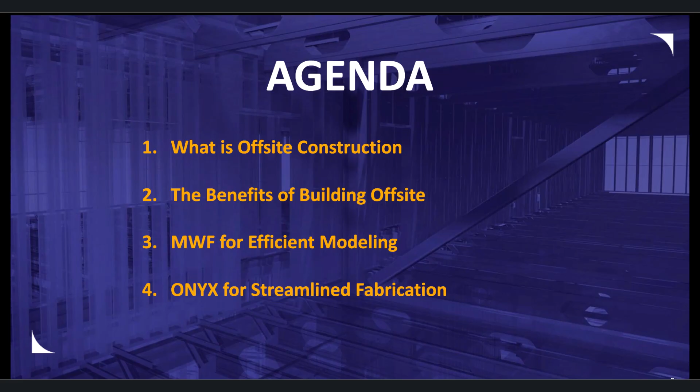In today's presentation, I'm excited to talk about what is offsite construction and the benefits of offsite, modular and prefab. I'm also going to go into MWF where I'll do a live demonstration showing some of the benefits of our tool. And following that, I'll jump into ONYX, where again we'll look at some of the features and some of the benefits of the tool as well.

So, what is offsite construction? You may have also heard the terms modular construction or prefabrication, which all fall under the same umbrella of offsite construction. And while these terms differ slightly, they all point to the same idea. As the name suggests, offsite construction is a fabrication or manufacturing and assembly of building elements at a location away from the final construction site.

Typically, this means a factory equipped with manufacturing equipment where components are produced and assembled rapidly and then transported to the job site. The idea behind offsite construction isn't new, but by taking advantage of technological advancements such as software solutions, CNC machinery, and robotics, the innovative method of construction has transformed itself into a valid substitute for traditional site-built construction methods.

The great thing about offsite construction is that it's used for all kinds of projects, including residential, commercial, and mixed use. Its applications are virtually endless. In certain cases, you'll see a mixture of traditional site-built construction and offsite construction, where only certain components, such as the wall panel, are manufactured in a factory, while the majority of the structure is built on site.

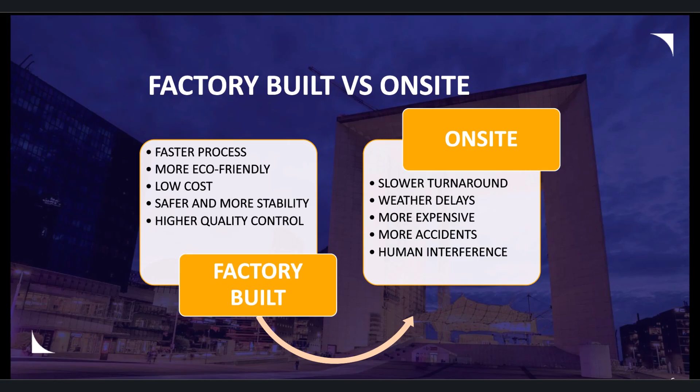One of the benefits is 20% faster design to production. This time is greatly reduced by keeping the framing data in Revit versus solutions that require a third-party platform for fabrication drawings. There's also a 42% faster fabrication drawing production, as 3D model parameters and drafting automation reduce the completion time of 2D fabrication drawings by reducing errors and change orders.

We have 90% waste reduction. This can be realized through accurate CNC output control and editing in a 3D environment, versus the manual check and edit process in older systems.

We'll also see a 20 to 50% increase in faster build rate. A project can be completed 20 to 50% faster using modular offsite methods compared to traditional construction. This is due to the elements being constructed in a factory environment, where processes can be automated and carried out a lot faster.

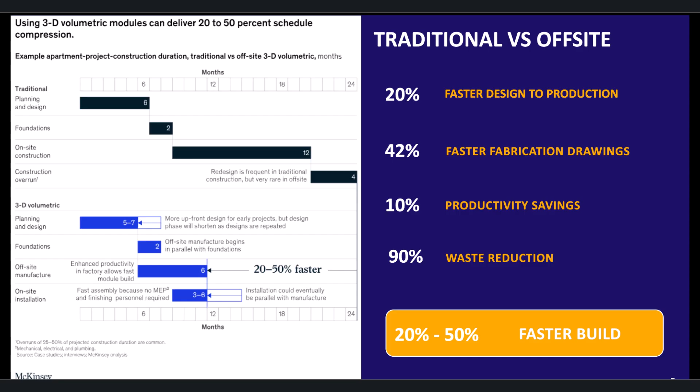So when we think about offsite construction and what it represents, we think of all the benefits of how it can boost productivity, save time, and streamline repetitive tasks. I'm going to show you a range of tools that exhibit those same qualities through the use of MWF.

I'm going to start by using the Quick Create tool, which will aid us in the creation of panels and reduce the amount of time it takes to produce our panels across a whole project. With the use of some templates and predefined settings, we can automate the placement of the panels by mapping our wall types to our templates.

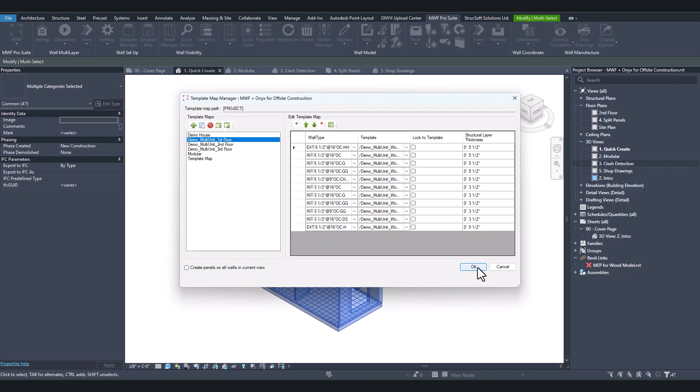So if I go into MWF, into template map, I can simply select a template which has been predefined, and from there we have a range of wall types which we can map to our MWF templates. From there we simply select our walls and hit Quick Create.

So this tool automates the framing process to ultimately reduce modeling time. And once complete, you can see that it's framed all of these different types of walls at the click of a button.

If I were to relate this to offsite construction, I'd say that we're implementing time savings through modeling and automation, and this is something we can also do when we compare offsite construction to traditional construction methods.

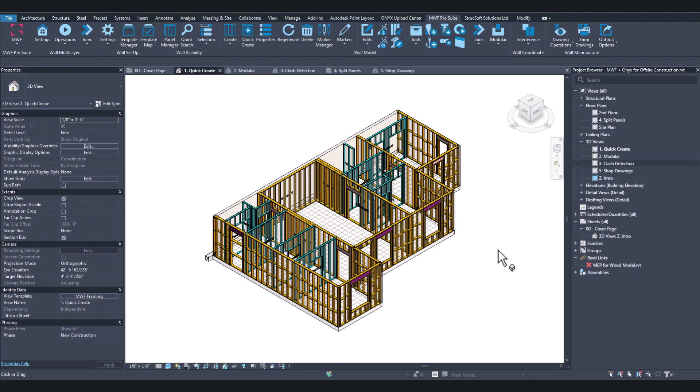So now we'll take a look at the modular tool, where we can see how this can also be used to boost efficiency in our workflows.

When using the modular tools, we can frame multiple units or panels that share common features and characteristics. This can be done quickly and effortlessly with a selection of modular commands. Again, in offsite construction, generating multiple elements in a short space of time is one of the key benefits of implementing these offsite construction techniques.

So what I'm going to start by doing is selecting one of these modules. These units all share common features, utilizing the same panels over and over again. Again, we can use the Quick Create tools: first point towards our template map, select the appropriate template map, and go ahead and hit Quick Create.

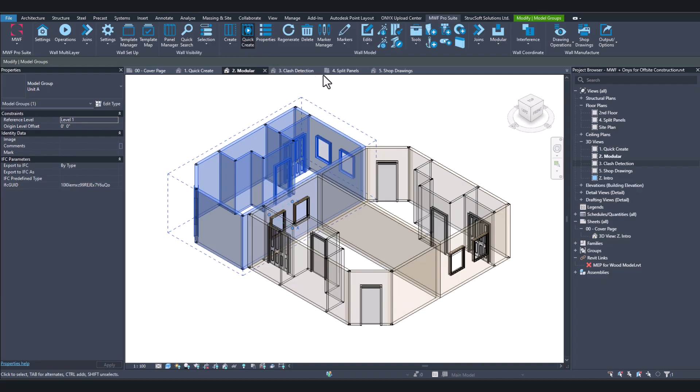So we can utilize this tool in a way that will supercharge our Quick Create feature by applying our settings to multiple modules at once across a project. This can be used on individual panels or on whole units. The tool has a few different features that we can use to match properties, copy elements, and ultimately delete elements when we no longer need them.

And as mentioned before, one of the key benefits of offsite construction is the ability to generate multiple elements in a short space of time. Once complete, we can see that multiple walls have been panelized within this unit.

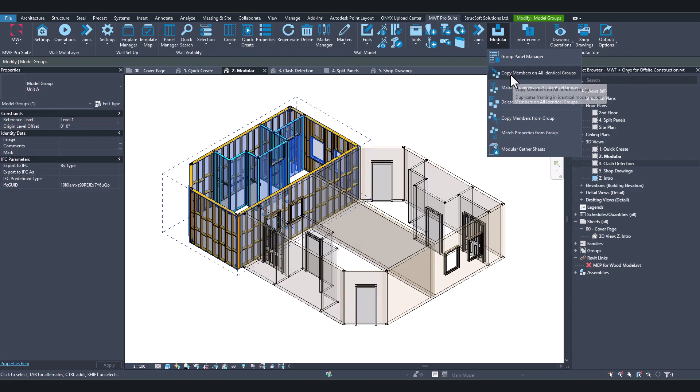So now these panels have successfully framed using the modular tools. You'll see that the original unit that we selected is now framed. So what I'm going to do is copy the members from this original group and have them applied to the remaining groups. So I'm going to go into modular and use copy members on all identical groups.

We can choose our naming convention, so we can keep it consistent with the panels that they were the original panels that these new panels will be generated from, and we can share the same name by using same as original. Otherwise, we can continue the numbering and have each panel have its own independent identification number.

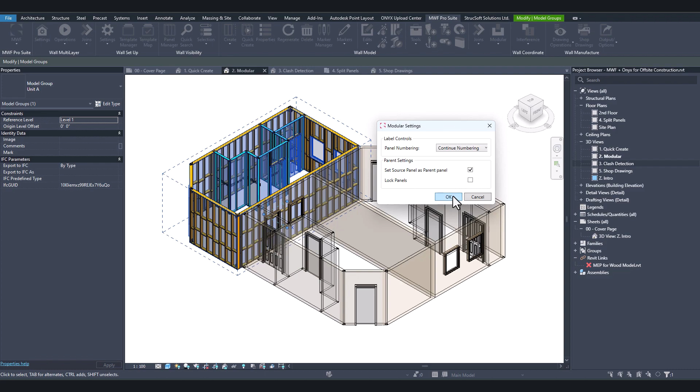We can choose to set the original panels as the parent panels, and if we were to lock our panels to a template, we could use the parent panels to regenerate the new settings or generate the new settings. So now these additional units have been completed, you can see that they are consistent with the original panels that they were generated from in this modular unit.

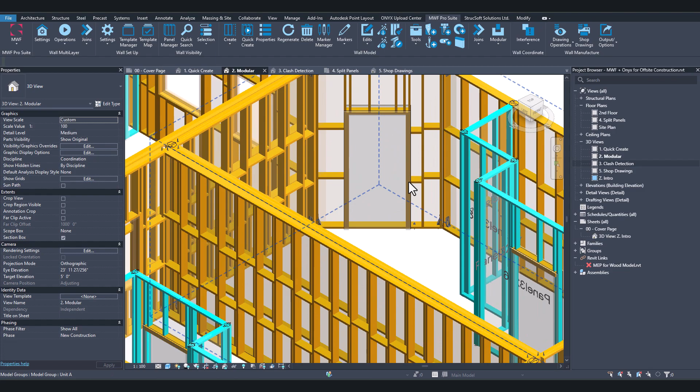This also ties into offsite construction in the way that we can generate these 3D volumetric and panels and elements and mass produce them in a short amount of time. What I'm going to do now is show you how we can make a modification to one of these elements within one of the units and apply the changes consistently to the other units.

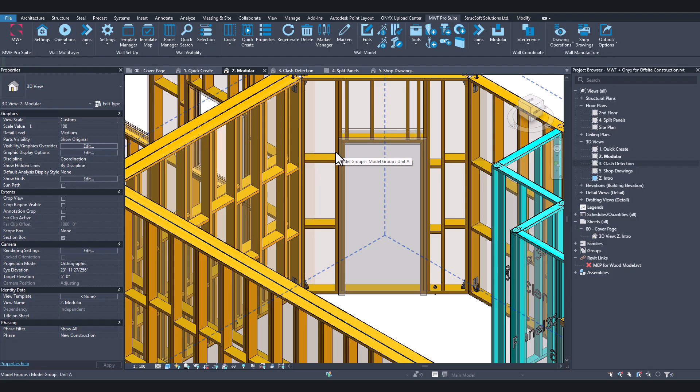So I can go into the panel properties, miscellaneous, and make a quick change. So we're looking at a door, and we want to add an additional king member on the door. Now you can see the additional member that's been added either side of the door opening. We can now apply these changes to the other units.

So if I refer to this unit here, you can see that we don't have the additional members around the opening. So what I can do is I can select this unit and still apply the changes made in my other modular unit and have them applied to this panel in the same way. So in modular, we have a tool called match properties, and we can do this for all panels which share the same group, or we can select individual elements and apply the settings.

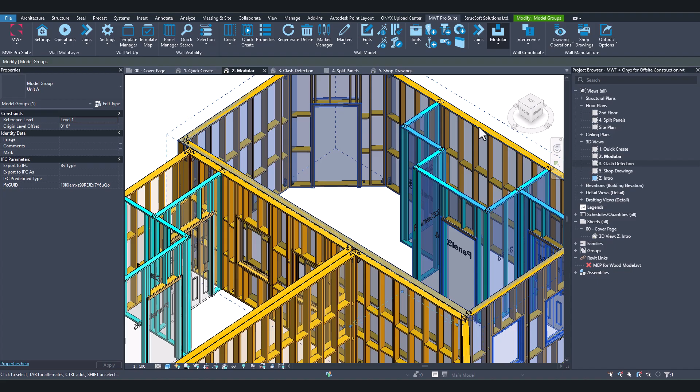Okay, so I want to select this unit first, and then from there I want to say match properties from group, and I want to take the properties from this group. Again, I've got the option to change the numbering convention. For now, I'm going to click OK.

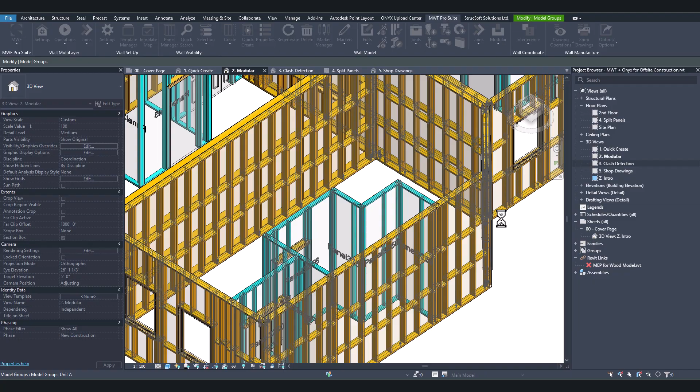So now those changes have been applied, we can check that the new unit now shares the same properties. So you can see here that the panel properties have been moved across to this panel, and we can match the properties across different modular units.

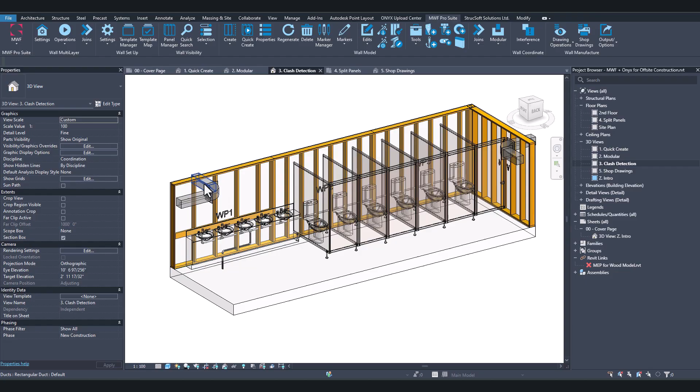Next, we'll take a look at another tool which I believe is great for boosting productivity and reducing tedious and repetitive tasks. So this tool is called clash detection, and here we have a model where some pipes are passing through our panel members, and there are some ducts passing through the face of the wall as well. So what I'm going to do is run the clash tool to prevent the clashes between these elements.

To do this manually, this would be a very time-consuming task, as we'd have to make sure there are holes punched in every single member. We'd have to check the hole type, and if there were any changes, so for example, if we had to move one of the elements or any of the elements in the model, we'd have to make sure we coordinate the holes with the new location of those elements.

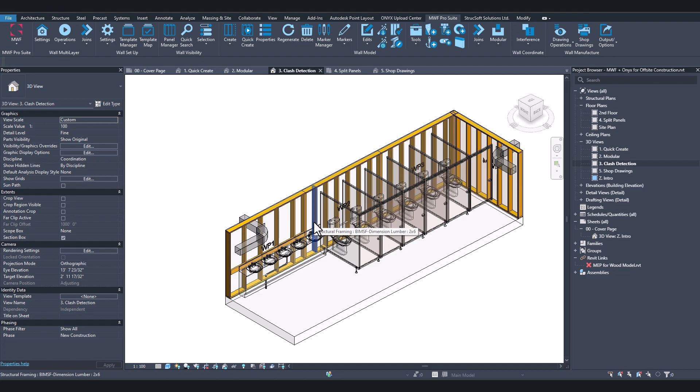What we can do is we can select, first of all, the ducts and the walls where the ducts are passing through. From there, we have a dedicated interference menu where we can run the interference check. It's going to run clash detection, and this will allow me to clash my wall against any of these selected categories.

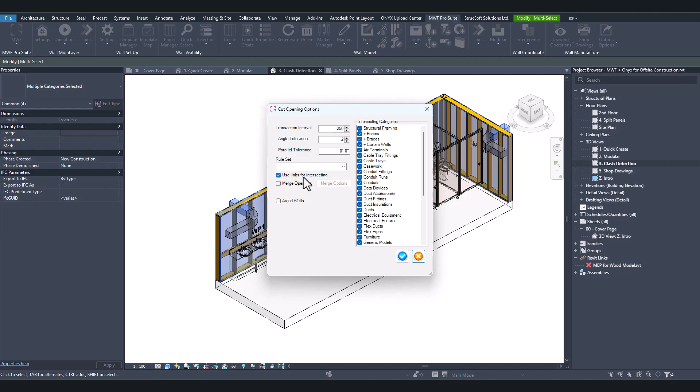We can also clash linked models as well, so if you're working with an MEP model provided by a third party, we can clash that third party model against our walls in our current model. All I'm going to do now is hit the blue tick. It's going to ask me to define a tolerance around the clashing element. In this case, we have these two ducts which are passing through the wall.

MWF is intelligent enough to detect the size of the duct, where the penetration is, and add a tolerance around the element. So I'm going to add a tolerance on the left, around the right hand side, top and bottom. As we've got multiple openings which we're generating, so we're generating an opening here and another opening on the opposite side, I want to use the same settings on the other side as well.

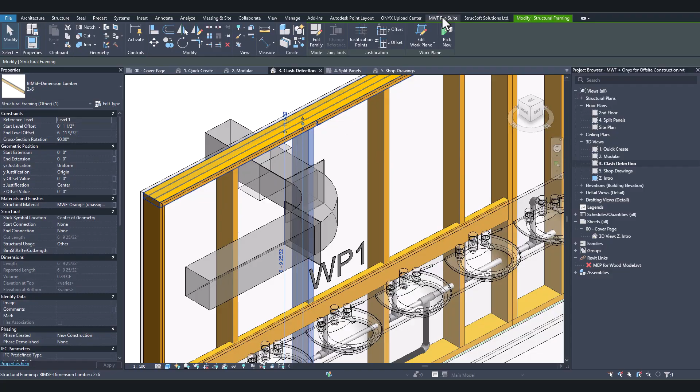So as we zoom in, you'll see an opening has been placed where the duct is passing through the wall. All we have to do then is regenerate the panel in order to show the new members or frame around the opening. This can also be done on the opposite side.

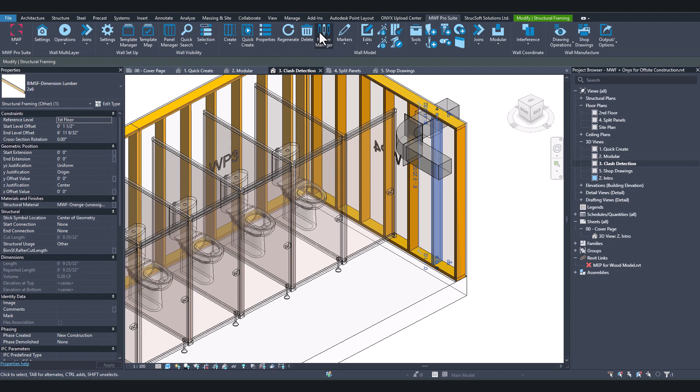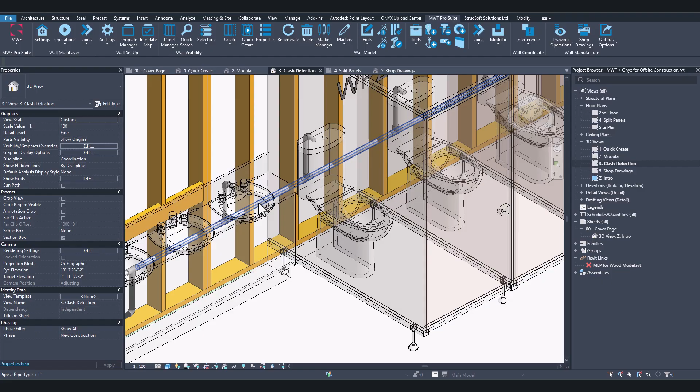So now we have another scenario where we have our pipes which are passing through the wall and passing through our stud work. We want to prevent this kind of clash, and to do so manually would take a lot of time. What we can do is we can really streamline this task by utilizing our interference MEP clash tool.

So what I'm going to do is select all the panels where the pipework is passing through. And we can go to MWF and simply click on the interference tool and run the MEP clash test. Here's my definition. I'm just going to use this to run the test. And based on our settings, 33 holes have been generated or punched through the stud work.

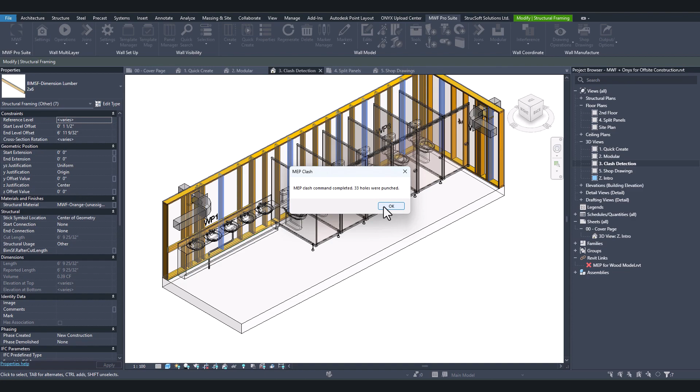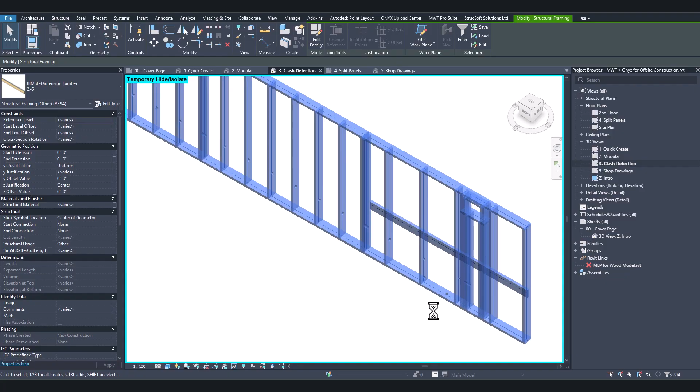So what I'm going to do is isolate my stud work, where we can take a closer look at where those holes have been punched. So you can see there are holes generated in these locations. And they've been punched automatically.

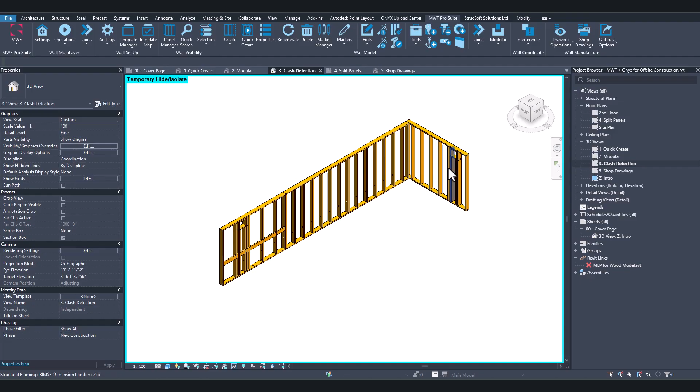Another tool that's great for productivity and saving a lot of time on a project is the ability to split walls or split panels within a wall. In some cases, you may receive a model from a third party, and the wall lengths may be too long for you to work with when it comes to transport and delivery of panels to site. In that case, we can set a maximum panel size, and we can split our panels down into smaller lengths so we can then transport them successfully to site.

Here in this example, we have an extremely long wall here, and we have another long wall just to the bottom of this model. We can split in two different ways, and first I'm going to show you a method that we can use to split this wall. So first I'm going to select the wall, go to MWF, and in the markers menu, we have a range of options allowing us to split the panel into smaller portions.

I'm going to use this vertical split by rule, which will give me the flexibility to set the maximum and minimum panel sizes. I'm going to leave the sizes set to 10 feet and the minimum panel size set to 2 feet. If there are any openings, I can ensure that there are no split markers placed within the openings, so no panels are generated in between an opening. I hit confirm,

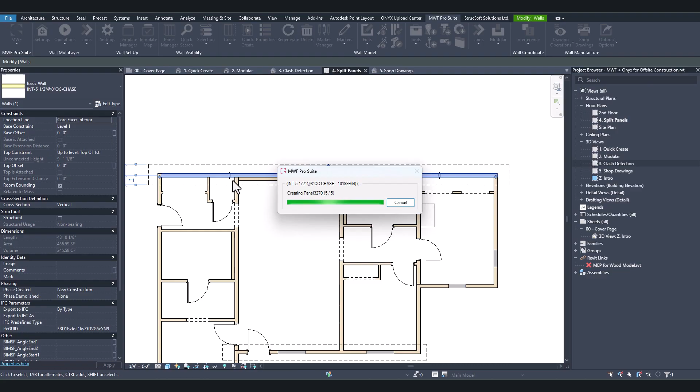and you can see in the view we have these markers that are placed consistently throughout the wall. These markers don't physically split the wall, but they will define the split points for the panels. What I can do now is select the wall, go to MWF, and simply create a panel. To split the panel into smaller portions, I can use the markers. I can choose a template, and I can simply create my panels, which will be split at the marker locations. And as you can see, we have our multiple panels generated at those split marker locations.

Another method that we can use to split our panels is simply by placing a marker directly in the view and then using that marker position to split the panels. So I'm simply going to go to my components menu and place a component. In the type selector, I can find my split wall horizontal component, and I can simply place this in the view. So I need to make sure I'm selecting a wall, and I can split my panel into smaller portions.

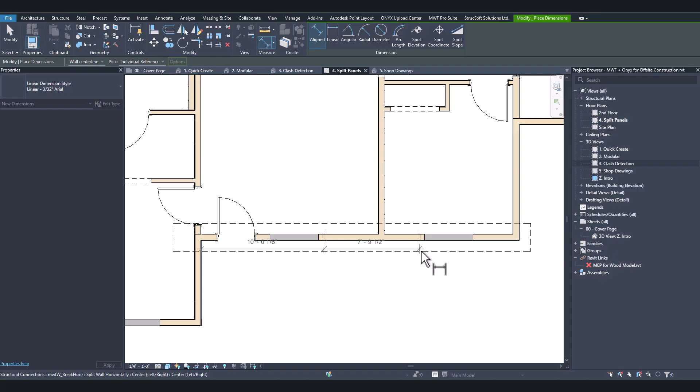If I want to be precise, I can place dimensions to control where I'm splitting to and where I'm splitting from, whilst avoiding any openings in the process. From there, again, I can go back to MWF and simply create my panel.

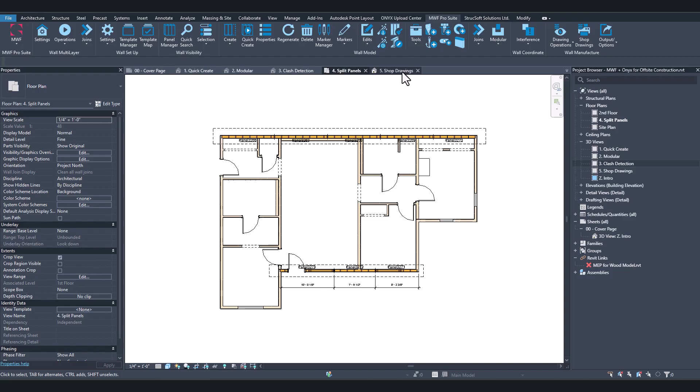So another really important aspect of manufacturing our panels and communicating our design is shop drawings. So within MWF, we have the tools to allow us to generate multiple shop drawings at the click of a button. We can select multiple at once, or we can select drawings on a panel by panel basis, but we can generate multiple drawings efficiently and quickly.

Each drawing can be consistent, and the layout and other things can be manipulated and saved as a template, which you can use to produce multiple elements at once, multiple sheets at once. In this example, we have our panel, and I'm simply going to select one of the panel members and show you how quickly we can generate a shop drawing.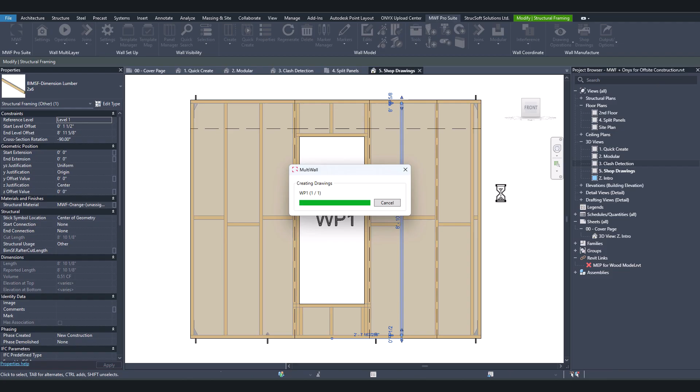So now that's complete, we can take a look at the drawings that have been generated. For each element that we need to place on our sheet, the views, associated schedules, and other elements are automatically created, and we're able to see those within our sheets.

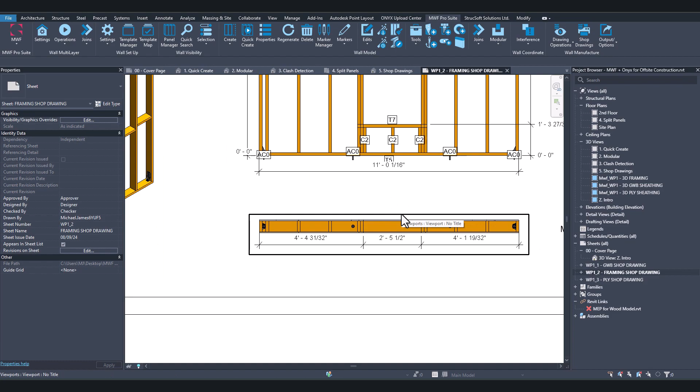Here you can see that we've got our elevation view, all dimensioned, and all members are labeled in the panel. You can also see that we have a plan view, showing a dimension based on the opening location and any hold downs and bolts placed within the panel. We have our 3D representation, and we have our framing schedule, which gives us information based on the types of members, any members sharing the same characteristics, length, and quantification.

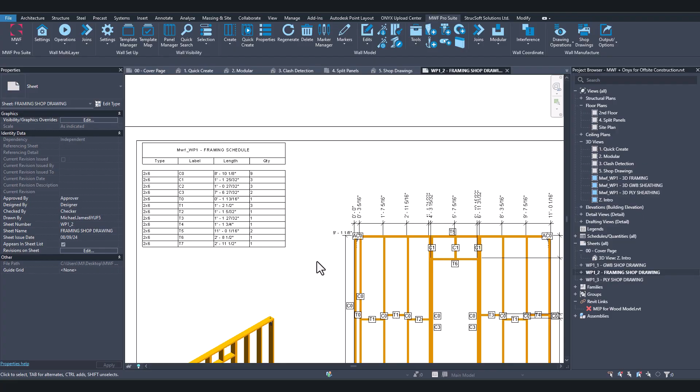These are only a few of the settings that are available, but there's a wide array of settings that you can use and can choose from.

We also have sheathing related drawings as well, and multiple settings that we can manipulate to generate all the drawings we need to extract the data that we need.

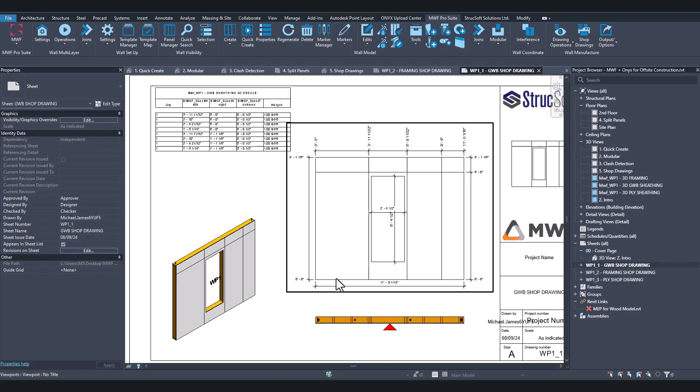So again, we have our elevation view, we have a plan view showing the interior orientation, and then we have our gypsum wallboard sheathing schedule.

On our exterior side, we have exterior sheathing, and again we have the same information that we can extract from these sheets. So we have our schedule related to these sheathing elements, where we can quantify those elements. We can see the sheet width, height, and also the sheet thickness.

All this can be modified using the settings within MWF, and there are multiple settings that we can change to generate different views and extract bits of information that we need.

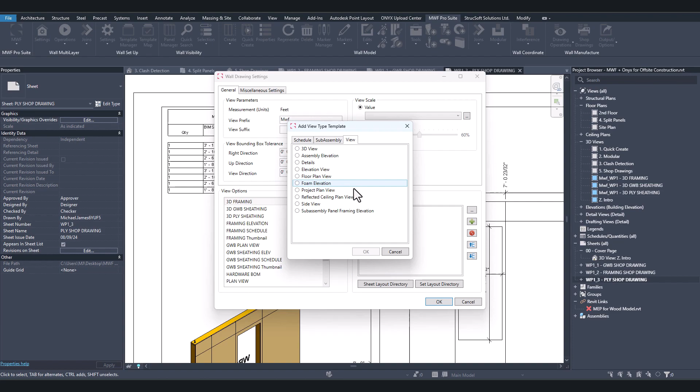One of the major key benefits of using MWF is that it sits inside of Revit. As it's a plugin inside of Revit, you can still stay within that Revit environment and still utilize all those Revit features alongside MWF. There's no loss of data, and there's no need to jump into a third-party application in order to get additional information. A lot of the information is still held within the Revit model and still accessible within the MWF plugin as well.

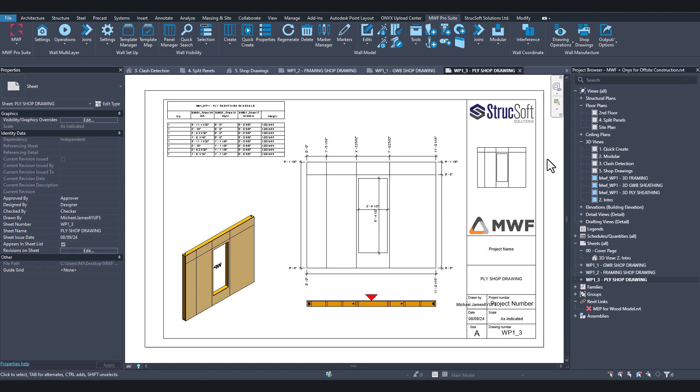I've shown only a selection of tools available to use in MWF, and hopefully these demonstrate some of the capabilities that we have to boost efficiency and productivity. Similar to offsite construction, we want to create things as quickly as possible, as efficiently as possible, and we want to streamline repetitive tasks in order to get the best output.

Overall, when compared to traditional manual modeling techniques using Revit, models can be produced in much less time with a greater degree of accuracy. One key benefit of using MWF is that it's a sustainable option and a sustainable solution.

We frame in both wood and LGS, and these are both sustainable materials and eco-friendly. Timber stores carbon throughout its life cycle. With responsible foresting practices, it is a reliable renewable resource. And steel is 100% recyclable. LGS framing includes recycled steel in much of its composition.

A big part of offsite construction is waste reduction. When modeling with MWF, you get accurate outputs and an accurate model where you can get cut lengths, quantities based on what's required on site and to generate your panels. This information is extremely important and useful when it comes to waste reduction. This is really a great solution when it comes to offsite construction and creating accurate Revit models.

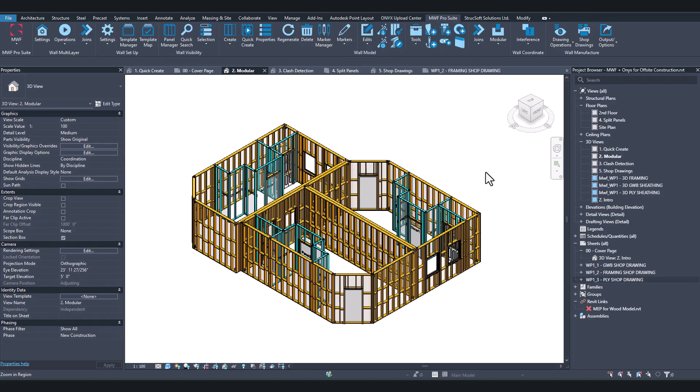So now let's take a look at ONYX. ONYX is a web-based production management tool and a bridge to your CNC machine via Revit and MWF. Just like many of the benefits that are realized through applying offsite construction methods and techniques, there are many advantages and improvements that can be experienced through the use of ONYX.

For example, ONYX is easy to implement. There's no need for high-end hardware or even a Revit license. It's extremely versatile and flexible. As ONYX is web browser based, it's accessible from virtually anywhere.

ONYX has a high degree of efficiency, and it can improve collaboration and communication within design teams through the use of status updates, exportable tables full of data, and also generating reports within the ONYX environment. ONYX is compatible with a wide range of roll formers and saw machines, as well as nailing and routing tools, amongst some others as well.

So what you can see in the view is the wall panels that we generated earlier using the Quick Create tool. What I'm going to do is upload these into ONYX, and we can take a look at some of those tools and how they boost productivity, just like with offsite construction and some of those techniques.

So first thing we need to do is link to our project, and we can see we've got a project that was already generated. From there I can select the project and upload any sections that need to be sent into ONYX.

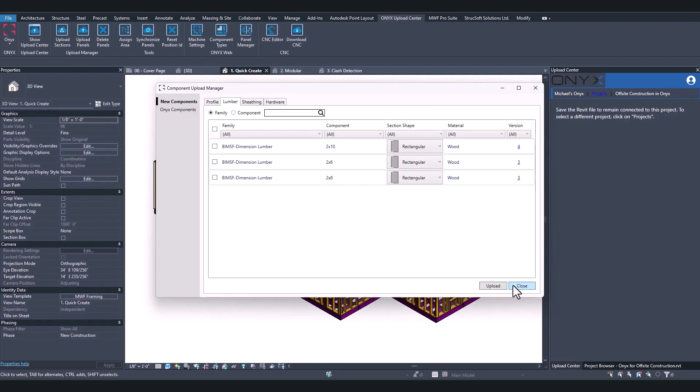After you've uploaded sections, we can upload the panels. So I'm going to select all of these walls, go to ONYX, and upload panels.

Once complete, we're opened up into a dialog box where you can see a number of panels, or a range of all of the panels that we've selected, and we can filter the list by searching for a specific term. So we can search for INT for interior, for example. We can also use the filter criteria, so we can filter by type, by panel type, by host level, amongst some other things as well.

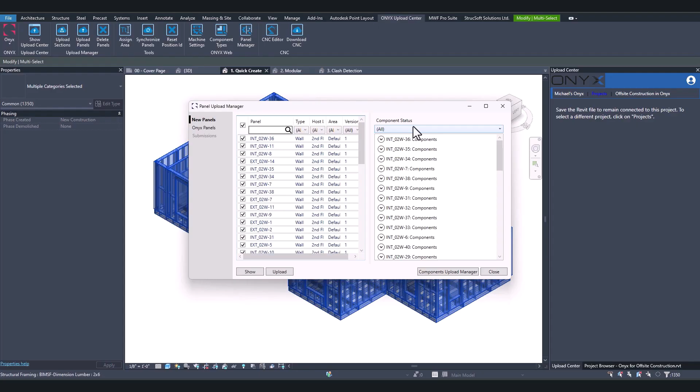I just want to upload all of the panels, but you can see we can check the panels beforehand, so we can check which ones are not uploaded, and we can simply upload all of the panels.

We can see some feedback to say how many panels have been successfully uploaded and which panels are wall panels, floor panels, ceiling panels, or truss panels, all of which are accommodated in ONYX.

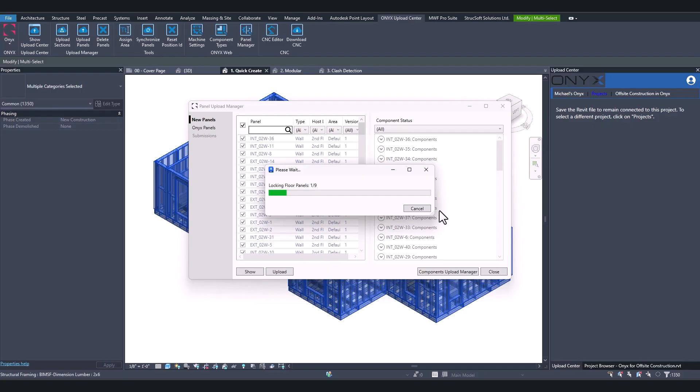This red overlay gives us an indication that these panels are locked and that they have been uploaded to ONYX. Now let's jump into the ONYX environment where we can take a closer look at some of the tools and features in that application.

So here within ONYX, you'll notice that we have a project available, and this is the project where we sent our geometry earlier on. We have a range of tools inside of ONYX which will help boost productivity and improve your workflows. For example, we can track, schedule, and sort panels using a range of tools such as work orders, sequencing, and the panel manager.

Let's take a look at the panel manager where we can see some information related to our panels. Here within the panel manager, you can see all of the panel types which are filtered or sorted by category. So you can see we have our wall panels, floor panels, ceiling and truss panels, all separated for us to find the information nice and easily.

All the information related to our panels is shown in this table, and you can see we have length, height, weight, and other information that we can gather from this table. Any information that we need to share with anyone who doesn't have access to ONYX can be exported using the export to CSV option here, which will generate a CSV file that can be opened in applications such as Microsoft Excel.

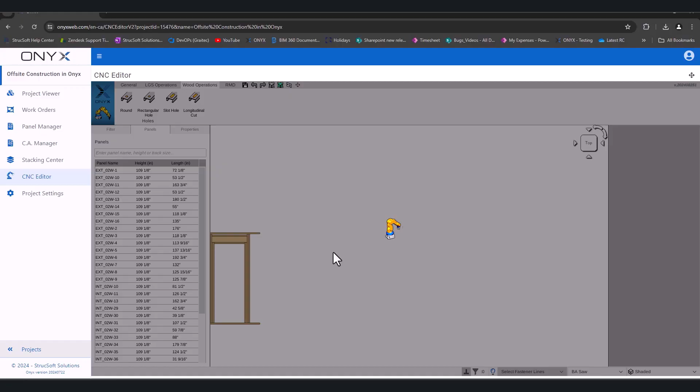So I can load panels, and then from those panels I can select one in the list. If I wanted to look at my external panels, I could select the top of the list, the external panel here, which has sheathing boards. I can hide the sheathing and show just the structural members within the panel.

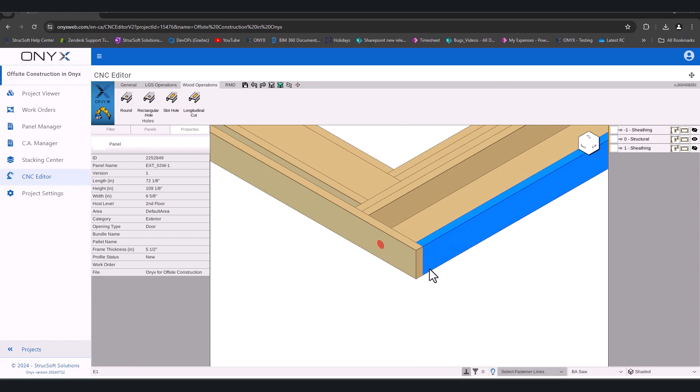From there, we can view any existing operations. So here we have a round hole, and we have a round hole placed at the bottom of the panel as well. These can be modeled inside of MWF and shown inside of ONYX, as we can see here.

Any additional operations that we want to add, we can select a specific member. So maybe I wanted to add a round hole inside of this vertical member. We can select a member specifically, go to our wood operations, and select the operation type that we want to add.

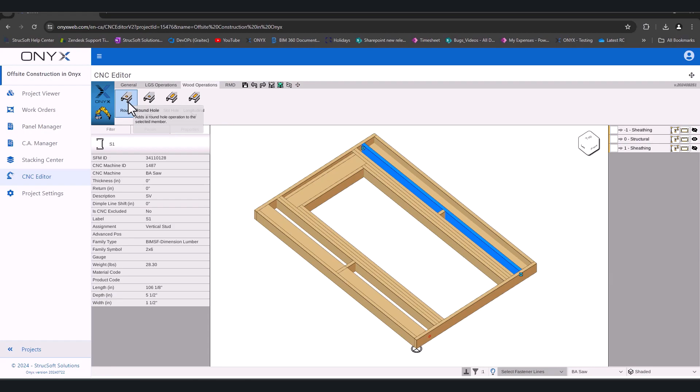And then we can specify the location of the operation by dragging it manually, or we can type a more specific value, and that will place the operation there.

So once you're happy with the edits that you've made to your panel, you can then save this as a draft, and we can come back to this at a later stage - it'll be treated as a work in progress. Otherwise, we can publish the changes and add those to the panel.

We have various tools that you can use to view the code before you've produced your panel, and this may be a useful step if you wanted to verify that all the operations are where you expect them to be. Any areas highlighted in red relate to the selected element. So you can see here we have the single member number, and then we have information in relation to the operations, its location, and a few other things - cut operations, drill operations, and a few other things as well.

If we wanted to download CNC, we can do that right inside of the CNC editor, and that is a really handy tool within the CNC editor, so we can download the output straight away.

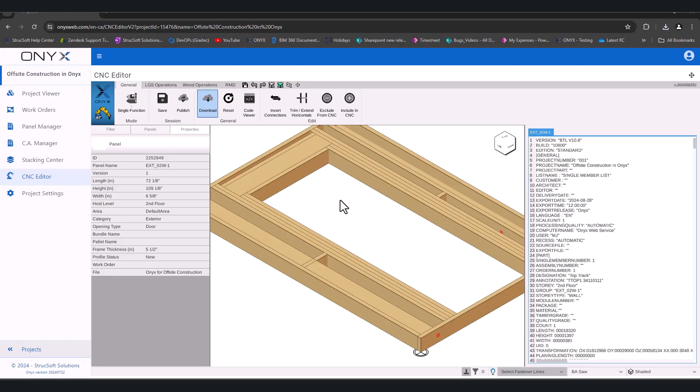Another tool that I'll demonstrate, which will help boost the productivity of our projects, is the sequencing tool. The sequencing tool allows us to add a logical order to the panels based on how we want to load the panels onto a truck, arrange them on site, or any other user-defined criteria.

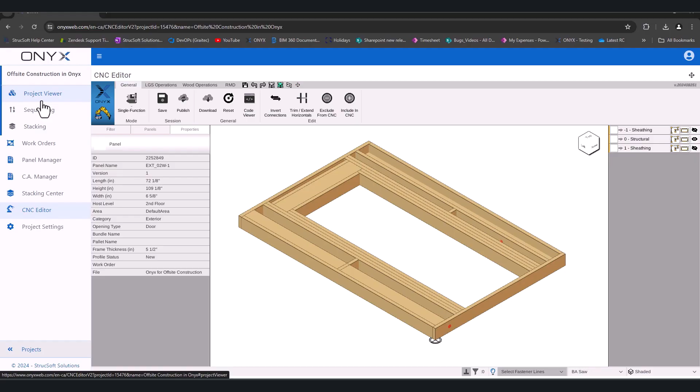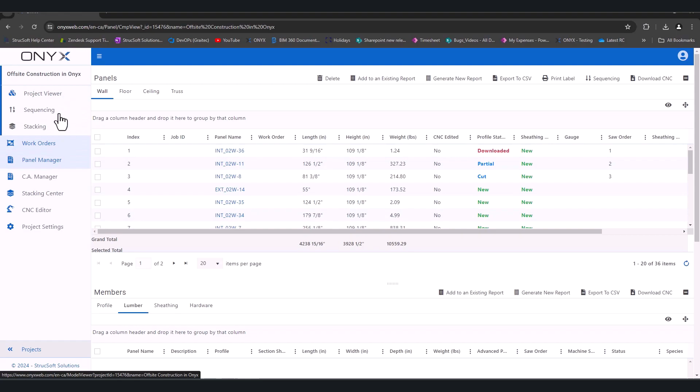So in the project viewer, I can go to sequencing, which will open up into this window where we can start to add a sequence to our panels.

Just like in the CNC editor, I need to select the criteria for my panels. So for example, I could load only the exterior panels in this case. I could choose to load only the wall panels, so I could uncheck floors and load in only the panels I want from the exterior side.

These are the panels that have been loaded in, and from there I can apply a sequence to these panels. We can change the level of detail, and that will affect how the panels show. There are a load of settings that we can utilize.

For now, I'm just going to go to sequencing, where we can apply a sequence by selection. The panels are currently showing red because there's no sequence applied, and we can simply apply a sequence by selecting a panel one by one and apply a sequence in the order that we select them.

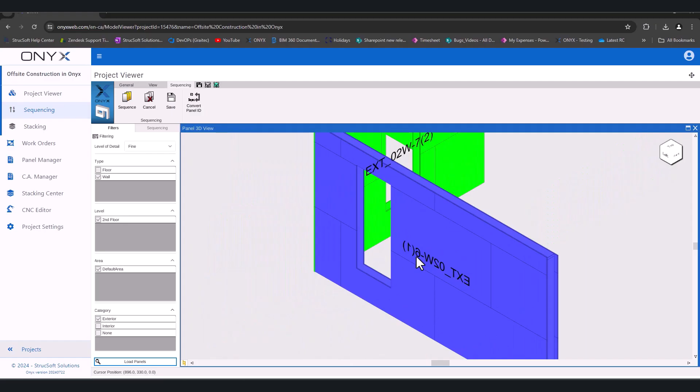Once a sequence has been applied to the panel, you'll see a number in brackets just to tell us that this has been assigned a sequence number, and that is useful as a reference. That will also show up in the stacking environment as well, which we'll look through shortly. When you're happy with the sequence that's been applied, you can say save, and that sequence will be saved to the panels.

In the event that you want to generate your very own sequence type, we can also apply different types of sequences as well. So we've got the exterior sequence, which is the one that was just active, but we can apply a new sequence using the interior option as well.

As you can see, when I've selected the interior stacking, the sequence numbers which were assigned to exterior have been removed because we can add a different sequence number in this case.

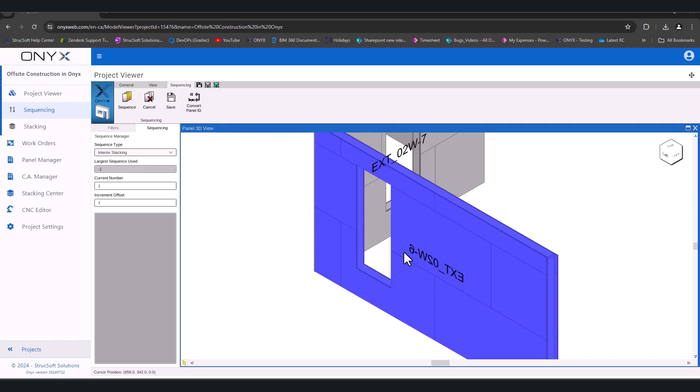Again, I can refer back to the filters. I can load in my interior panels in this case, and I can apply a sequence to the remaining panels.

Rather than apply the sequence by selection, I can apply the sequence by converting the existing panel ID number to a sequence number. That may be more handy because it will do that quickly, and it will apply the number based on the numbers assigned to the panels.

I can choose the sequence type, which is interior, and I'll say convert. Each panel has been given its own sequence number. You can see here, based on the number assigned to the panel, the sequence number corresponds with that.

Okay, so that is the sequencing tool. And if you wanted to see an animation related to that, we have the play option, which will play an animation in relation to the order of the panels.

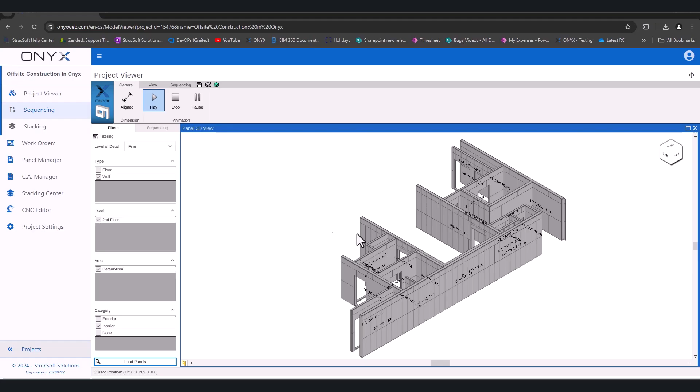So now we'll look at the stacking tool, where we can plan and streamline the panel distribution and logistics through the stacking and bundling toolset. We can plan trips more effectively by getting accurate representations of the size of the trucks, any weight constraints, any size constraints that we're working to as well.

What we're going to do is start a new stacking session. So here you can see stacking sessions, and I'll hit new session.

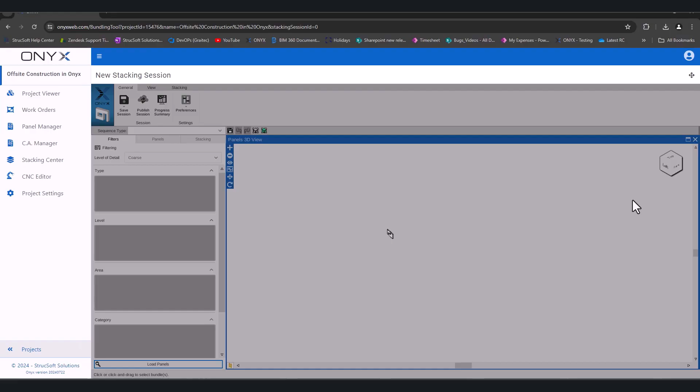From there, it takes me into my window where I can load my panels once again. Just like before, I can decide which panels to load in, and I only want to load in my wall panels. I'll set the level of detail to fine, and I'll just load these selected panels.

Now in the view, you can see all of the panels that I've selected, and we can start to place these in containers. The first tab lets us filter the information. Second tab will show us all of the panels that met the criteria that we selected in the filters. Third tab dedicated to stacking, where we'll see all of the containers and all the panels once we place them in containers in a tree view, where it will show us where the panels have been placed.

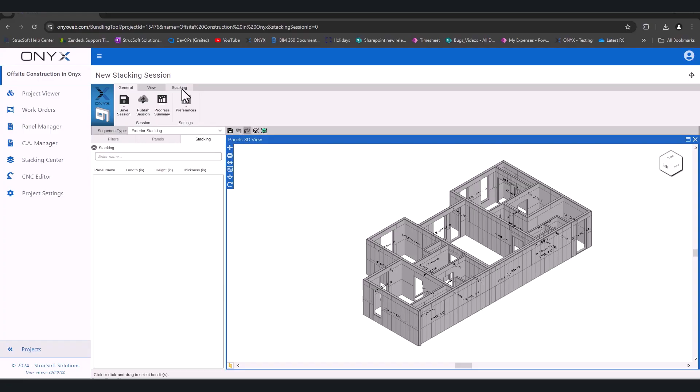I'm going to go into the stacking tab at the top of my window, where I can add a new container type. So I'm going to say add bundle. From there, we can add based on selection, so I can start to select panels and add multiple panels by selection.

I'll hit the plus sign and that will place them within my bundle. We have two views dedicated to our container where we can change this to make it easier to load the container. So we can load them in elevation and we can edit them in plan view as well. We can orientate the view however we like, and that makes for ease of access to the different areas.

We can generate different templates for our bundle. So we can have a larger bundle, smaller bundle, all based on your constraints that you're working to. And in this case, you can see that we have a slightly longer one. In the view, I can rotate my panels, so I can select them all, and we have a range of modification tools that we can use to alter the appearance of the panels.

We can resize the container as well to fit around our panels if we know that we have enough allowable space in order to do so. Best practice would mean that we would usually make sure our panels fit within the container, within that constraint that we're working to, but we do have a tool that allows us to resize where needed.

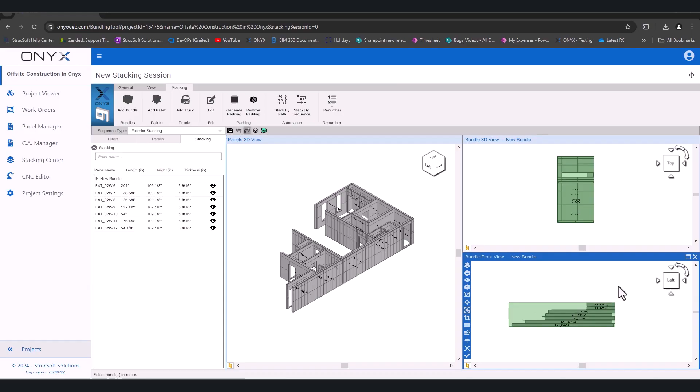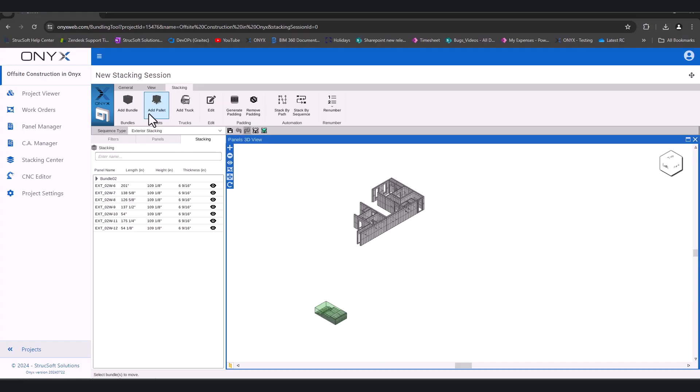Once you're happy with the changes you've made to your container, we can simply hit the tick and give it a name. I'm going to accept the default name and I'll say add, and we'll see the container that's been generated. So we can generate bundles, pallets and trucks, and we have methods in order to place different things in different containers. Maybe for these remaining external wall panels, I want to place these in a pallet instead. So I can select the panels, drag and drop, and you can see those are placed inside of the pallet.

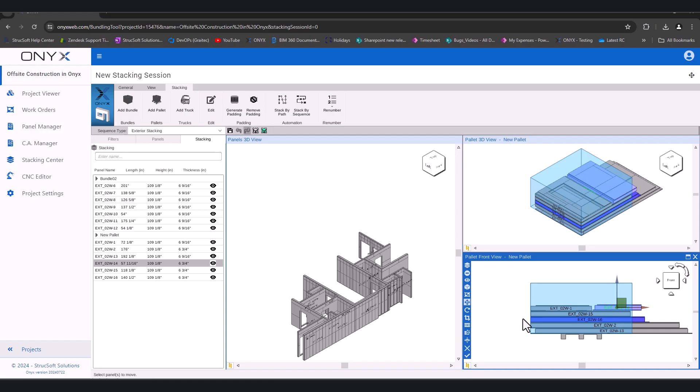If I wanted to lay a panel next to an existing one, then I can actually use these edit tools to move things, rotate things, and remove any gaps in between. So we can use the collapse tool to remove any spaces. Once we're happy with the changes, we can then hit the tick again, and we can call this ext to represent the fact that it houses those external panels.

Maybe we would like a quicker way to load our panels into containers, and we have different methods to do that. We have a stack by path tool where we can draw lines to place our panels inside of the container based on the panels that the lines have passed over. In order to use stack by path, we need to first generate a bundle or a pallet or a truck, and then we can activate the tool.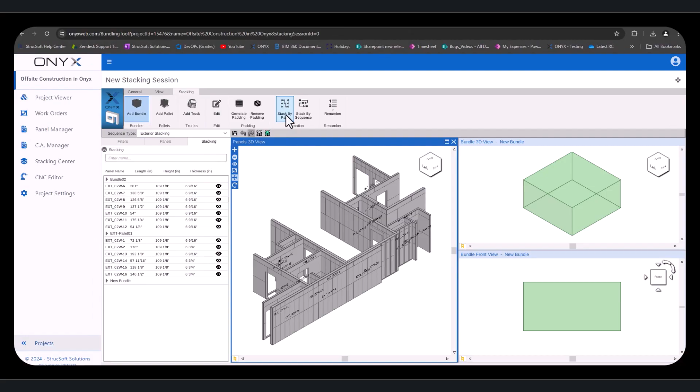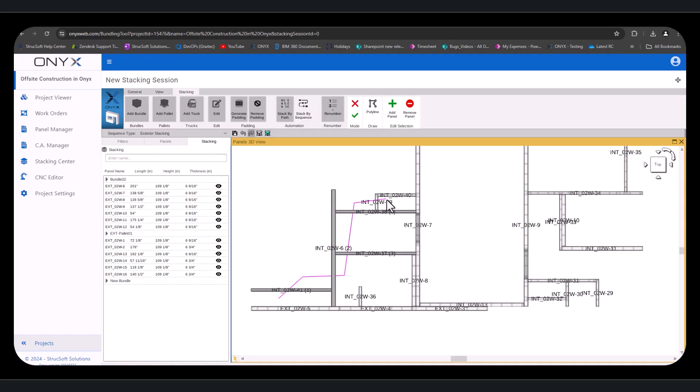We can select elements based on their category. So in this case, I've categorized the panels as external or exterior and interior, and I'll want to select the interior panels in this case. From there, it opens into a plan view where we can start to draw a polyline, which will pass over my panels in a specific order. So maybe I'll start from this left-hand corner, and any panels that this line will cross over will be applied to the container.

Once you're happy, you can hit the green tick and it will load the selected panels into the container that you've selected. Again, we can make any modifications that we need to. We can resize the container. You may want to remove the larger panel in this case and stack that with the other larger panels. That's totally fine. But in this case, I'll just accept.

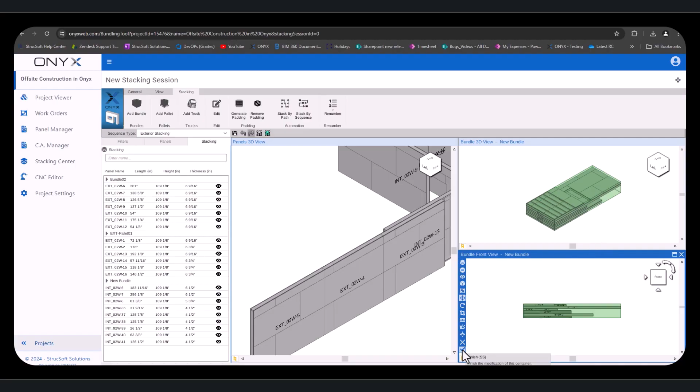We can also stack panels by sequence. So stacking by sequence will take the sequence numbers assigned to the panels and it will stack them in the order that they've been sequenced. So I'm going to click Stack by Sequence. I can choose the size of the container I want to use. In this case, it's referring to my bundles, and I'm going to select a larger bundle. I'm going to say Set, and then I'll define the sequence type that I want to use. So these were numbered using the interior sequence, and I'll say Set.

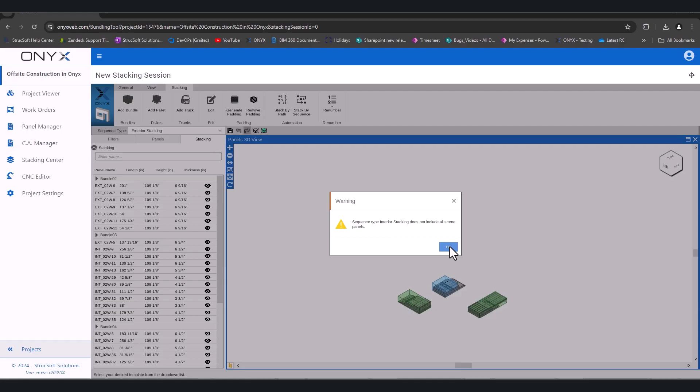It's just giving me a heads up that all of the panels that have been sequenced aren't all being placed in containers right now. That's okay because some of the panels are currently hidden in the view. We have floor panels as well, which are currently not visible in the view.

So for now, we have all of our wall panels placed in containers. We can make any last-minute edits very easily by clicking on Edit, selecting a container, and making an edit to the selected container. In this case, I just want to resize these elements or resize the container, and we can go ahead and do that.

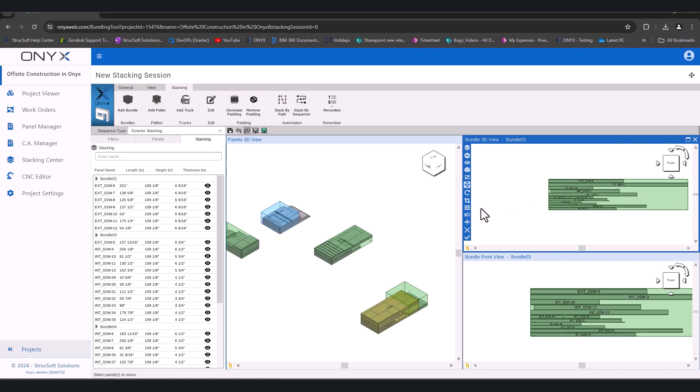We have tools which will restack the panels as well. So rather than stack them in order, maybe you just want to stack them in a way that is easy to transport. We can reorganize the panels so the stack is a little more manageable.

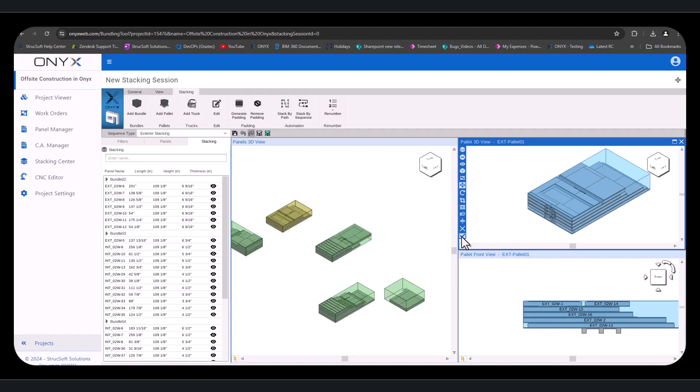So now we've generated all of our container types. We're going to want to place these in a truck so we can transport them to site. I'm going to quickly modify this one and add a new truck. I can say add truck, and this is my truck size, where I can now start to place all of my containers by dragging and dropping them into the view.

And I want to reactivate that so I can start to load it with the panels again. So again, I can drag and drop these elements into either view, and I can change the positioning if I want to.

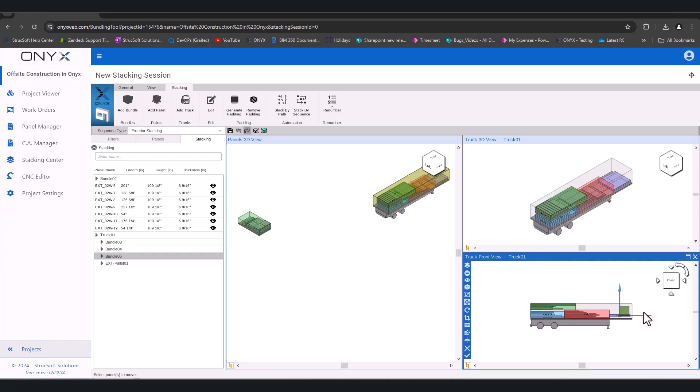In this case, all the panels may not fit in the first trip, which is fine, and at least we're aware of that because we can see that representation in the view. If any clashes occur inside the truck, you can see it highlights red to tell us that these elements are overlapping and there isn't enough space to house both of them.

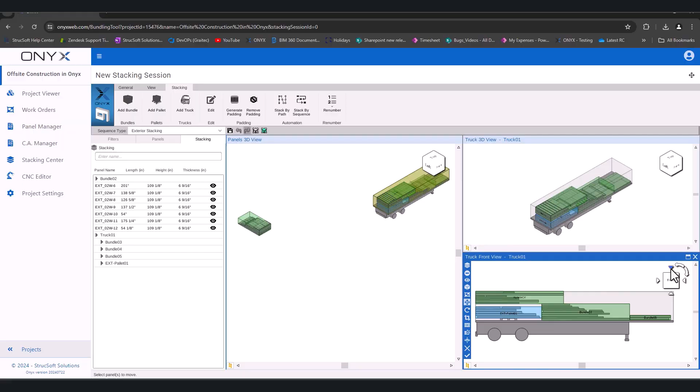So once you're happy with your truck, you can check all the different areas. You can also move all of your panels if you want to.

And we can confirm the truck just like that. I can add a second truck where I can drag the remaining panels onto it. Again, I can make some adjustments to these elements by using the rotate and move edit tools in order to position it however I want.

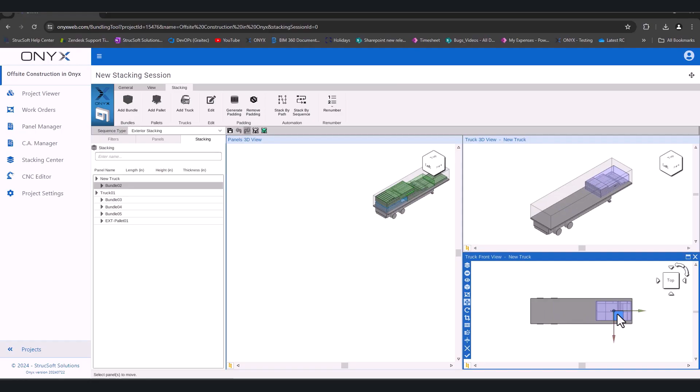So now we have our two trucks loaded full of panels. We can go to general, save this as a draft, and also publish the session. If we save as a draft, it's a work in progress that we can come back to at a later stage. But if we publish the session, we can then generate a report from it.

So I'm just going to call this one Offsite, click OK, and I'm going to go to my stacking center where I'll be able to view the information related to this project.

So we've got our bundles, and if I select one of the bundles, I can see the panels contained inside each bundle. If I wanted to see the pallets and anything contained within them, I can view that information again by selecting a pallet and seeing the information at the bottom here, where it separates all of the elements.

And for our truck, we may want to view all of the elements within it. We have two trucks available, and we can view the contents of each one. We can break that information down into panels - which panels are in bundles, which are contained, and which panels are inside pallets inside the truck.

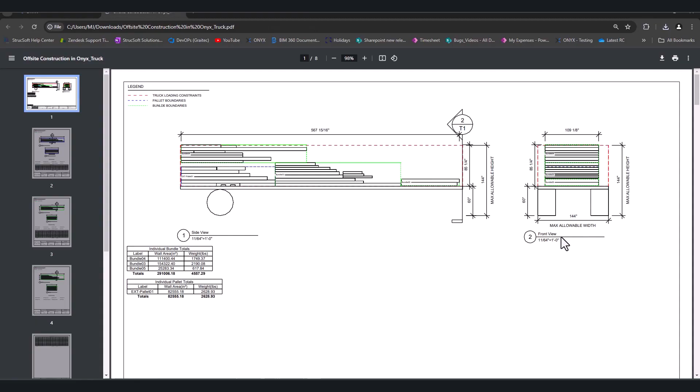So maybe I want to generate reports to show this information to a third party, or feed this back to a member of the team. I can generate a report for the selected elements or a report for all of the elements. It will give me a breakdown of all the panels inside bundles, pallets, and trucks. In this case, I want to see an overall report giving me all of the information in one place, so I'm going to say generate a report for all. I can open up the report, and from there we can see a breakdown of all the information that was contained within it.

By utilizing ONYX, we can track, schedule, and sort panels. We can manage and coordinate data. We have greater manufacturing precision, and we can plan and streamline processes using the range of tools available. I've only demonstrated a few of the tools available, but there are an extensive range that you can still utilize which I haven't demonstrated. Hopefully that's given you an indication as to how ONYX can work, or could possibly work, for you. I hope you enjoyed it. That's all from me.